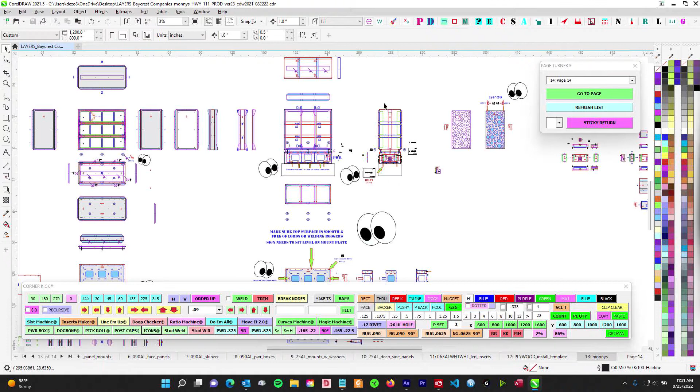Most of it's just a remix of all of our principles, so I'll just kind of point out how they work here, but none of this should throw you. It's just a mishmash. So let's go over the lay of the land.

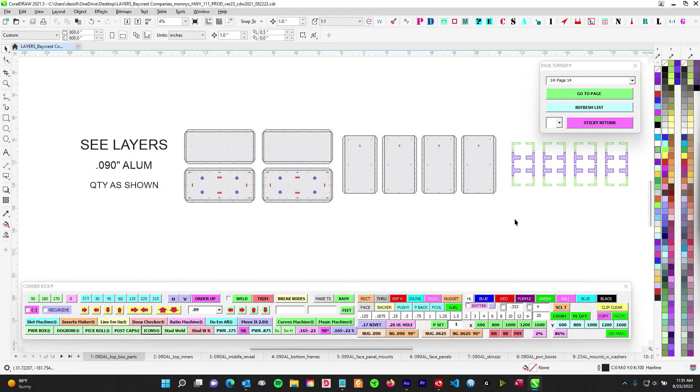I've got outside boxes, I'm calling them. The monument's kind of a wide boy, so a little wider than we're used to usually. But so you've got your jigs, and this will just be the outside box. And then there's sort of an inner framing, C channels and stuff like that.

You've got your middle reveal, 2 inch tall. We're going to fab that. And then the bottom box. So it's like a 3-section thing. We'll go over that, a little bit different than what we've done before.

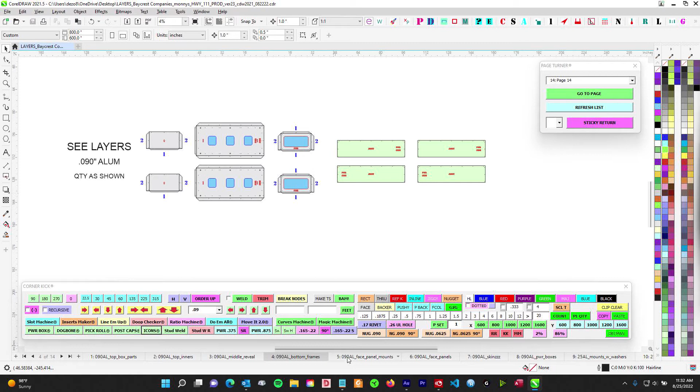You recognize these - these are just going to be the rivet-on face holders, the panels. And then it has exchangeable faces.

Now in this one, I'm sending this over to route with this note. We're still waiting - there could be some that have customer files that need to be approved. So you can route everything else and just wait until I confirm. Otherwise, we'll just route blanks and then we'll have to replace them later.

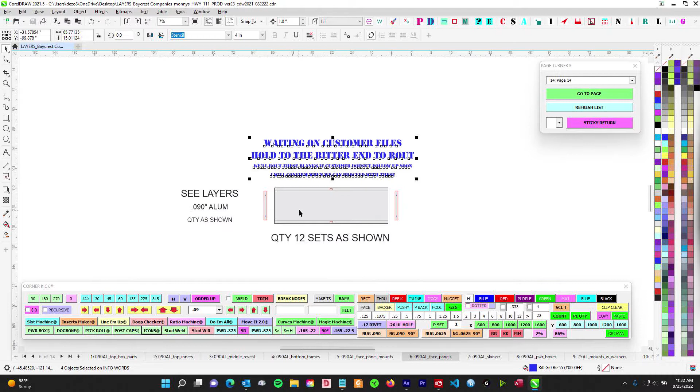So here's all the skins. I put them separately. Got your 4 - again, there's quantity 2 monuments. They're all identical, so everything should be in quantities of 2, multiples of 2 anyway. So you got your side.

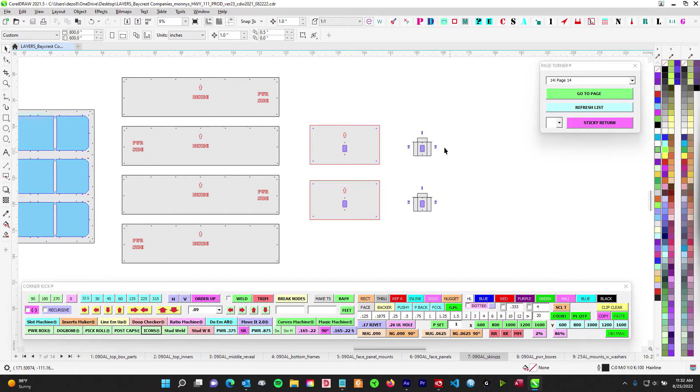So I got the bottom skins over here and got your side skins. And we're going to do the little birdhouses, or the little covers anyway. But those are going to be on the inside of the bottom powers there. We'll go over that, so keep an eye out for those.

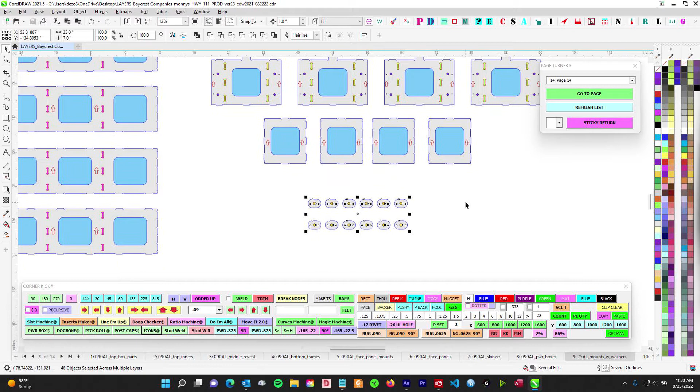Custom bird power boxes as usual, so keep an eye out for those. And you're going to have 2 large mounting foot plate thingamajiggers - that's the technical term, the thingamajiggers. And then you're going to have these little washers here for bolting this thing down. And then these things have some decorative side plates to kind of make them look cool. So look out for all this.

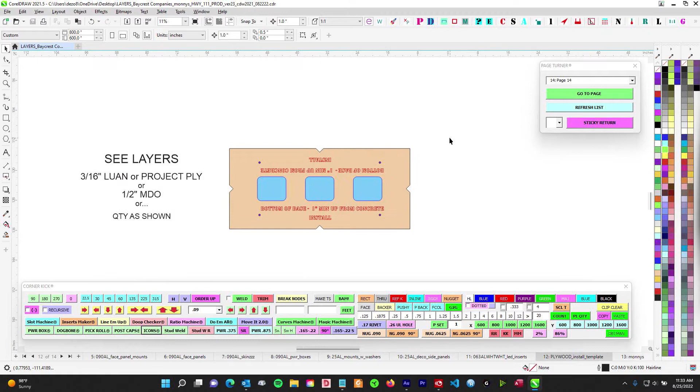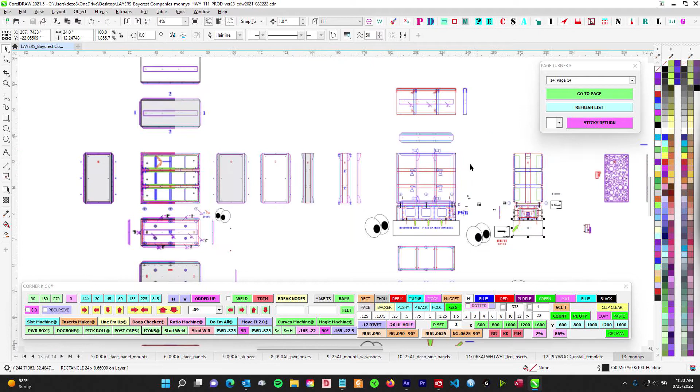All right, so where do we start? So like I say, this is the overall view of it, it's the side view. It's existing concrete, like I say, it's got 3 removable panels on one side and 3 removable panels on the other. So these guys are small enough, they're under 4 foot, that I went ahead and we're just going to do a tight shoe box.

Let's just start with these face frames. We're going to start with a tight shoe box. You can adjust the top and bottom in and out a little bit. And then we're just going to have screws on the end. The ends are equal, they're symmetrical, so you can flip-flop them either way.

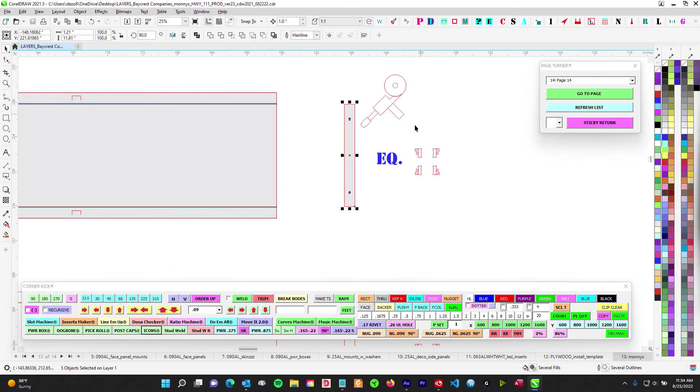I kind of laid it out that way for you, so you don't have to worry about getting them up or down. But like I say, we're going to wait till the very end on this, to see if anyone gets approved for logos before we route these. But you can get these routed up, so you kind of know how these work.

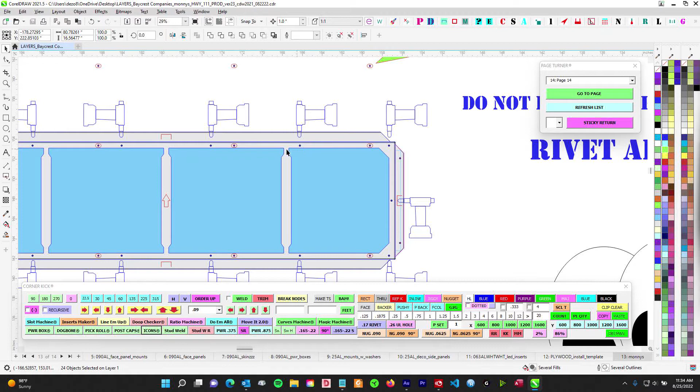And then when we're done, everything's all nailed down, you can just go through and slice these apart to separate them. Same thing with the face - when you guys go put the face, it's going to match those plate things there, and you'll just chop it all out. So that way it's stable for you.

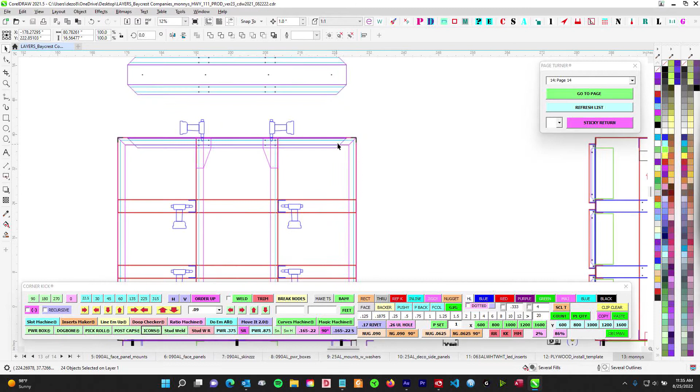Anyway, let's go over the frame. So the frame, like I say, it's a remix of what we do because it's so wide. We're kind of doing that inner frame like we do for Loma Linda or Panera, where we have the inner frame and then we put the hard candy shell. Similar - so on this one, it's just going to be a piece of 2x4 C channel that we fabricate for the top and the bottom.

Let's go over here - here it is. So you're going to have the top and the bottom.

Now these dog bones will be on the top and the bottom. It doesn't matter, I just kept it that way, it's just easier in case you accidentally get it the wrong side up. You don't have to worry about it.

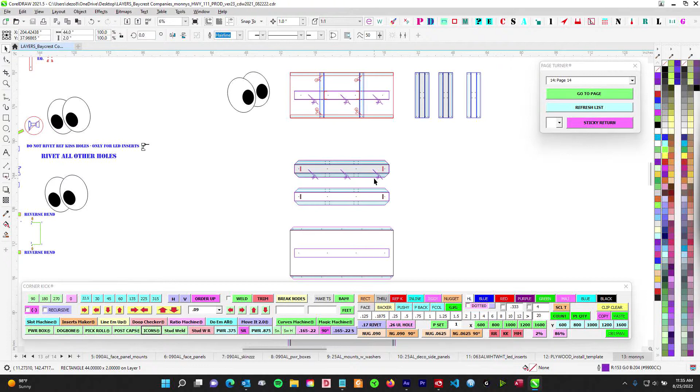So you'll take this one here, fold it, and then take these long runners with the little kick-out legs. Those are your two main structures. You can see where you're going to create a top bar here, and then a bottom bar there. And then this is all just rivetable.

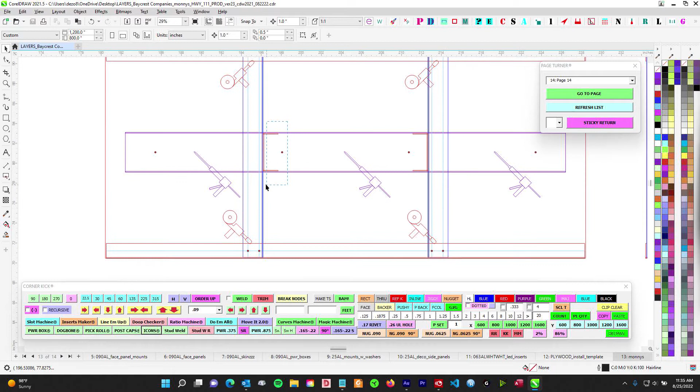And then you're just going to rivet those. This goes inside the other one, trying to save that jig. So this is a top view of that top bar. You'll slide that in there, go ahead and rivet that up. And then you'll rivet in some crossbars here that extend to the face.

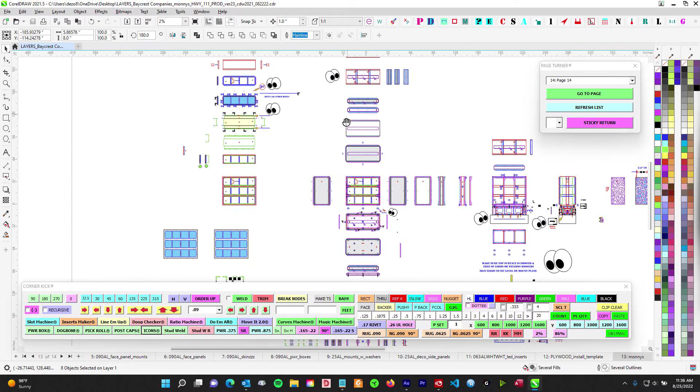And then how we do when we have these removable panels like this, we'll have a C channel that runs across. So these jigs might be familiar to you. You're going to have a C channel that runs across, and these C channels are up here, with all the various holes for all the various things. So you can see where these two holes here interlock with that crossbar going across there.

So again, we're pushing 22 inches wide, so I wanted that stability, you can see where that goes across. And these are the C channels for the face.

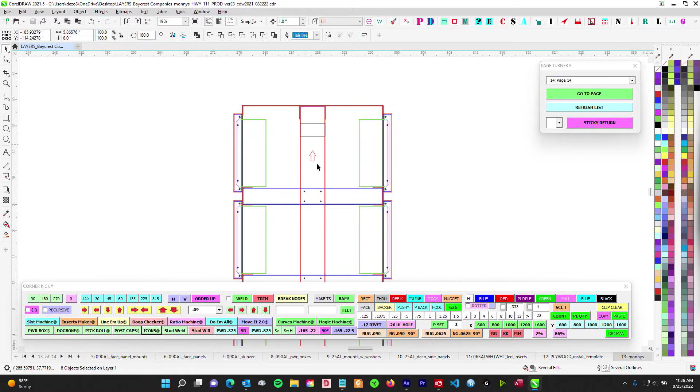So these guys here, I'm thinking you could just rivet all this crossbar stuff first. And then when you build this around it and put the skin around it, you can lords this all up nice.

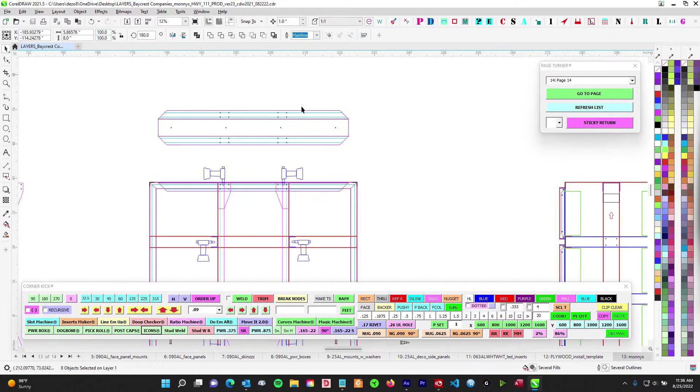And then when you bring these in, you can go ahead and tack those, just for easeability, because you can't really get the rivet gun in there. But this crossbar inner part, I think you can rivet all that together, and then start lordsing and building the outside frame to it.

So it's kind of similar to that inner frame with the hard candy shell. And then once this box is built, I think you're safe to go ahead and lords on your faces.

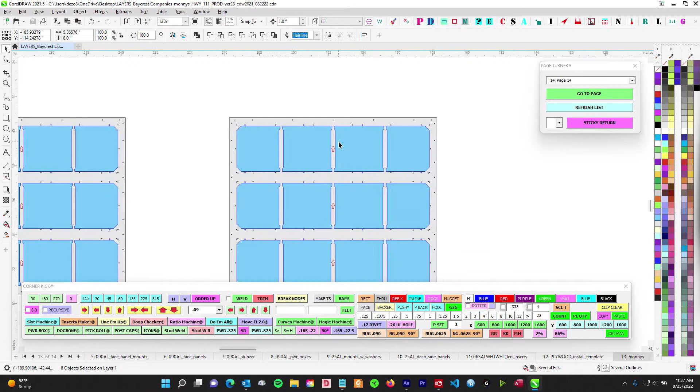I didn't do a left and right, they should mirror perfectly, it's just up and down. So make sure that's up, but you should be able to just use one in one direction, one the other. If you want to make sure, these reference kisses could be the inside of one, and this could be the outside of the other. Just keep them facing the same way, but they should mirror horizontally with no problem.

So I think you're good to go. If you build this box, get it all tacked, get it all built, then you're good to go to just lords on faces, and then you're kind of done there.

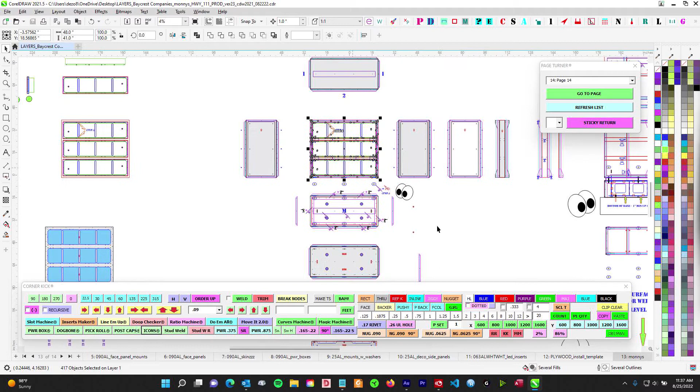And then similar to how we do, we make our reveal, which is here. So the reveal is just 2x all the way around, fabricated channel. And then again, this slides inside, trying to save those jigs. And then you can just tack it, clean it up.

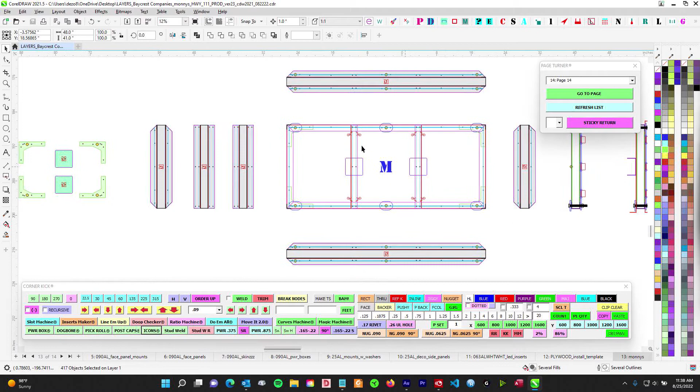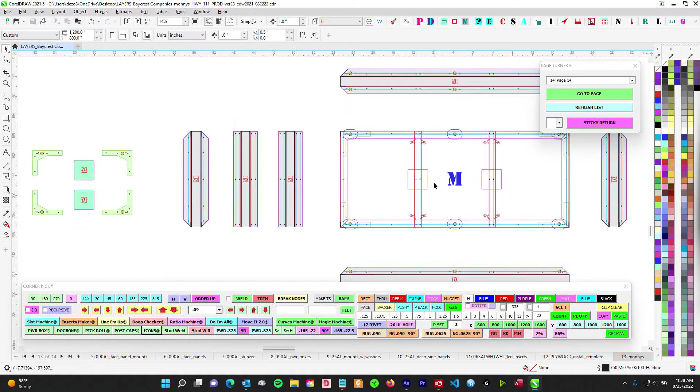But that leaves us with a void. And because this thing's so wide, the sign itself is so wide across here, I went ahead and gave you, copying the Indio letters, some little plates here that you can tack to this and then clean it up. So you can just tack it there and there. So on the top and the bottom, you can take these little square pads, and that's just going to help build up that void down there, because when that goes across.

So if that makes sense, I think you got that. I thought I made a little call-out for that, I must have got lost. Anyway, there it is, the 090 spacers.

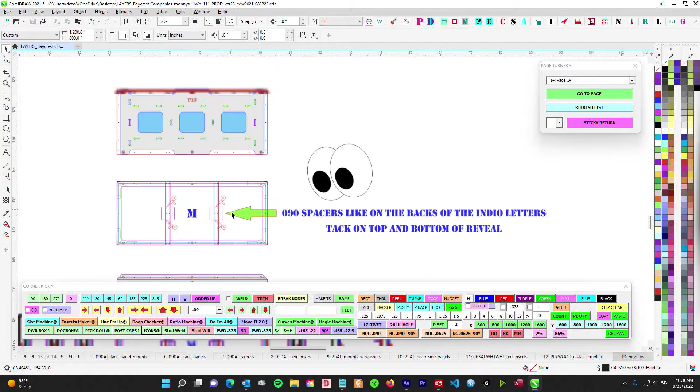So you can just tack those up, kind of like you did on the back there, so when you crank down the bolts. Once you get that taken care of, you're just going to take that, lords it, and self-tapper that to the bottom of the main box. So you got the main box, you can go ahead and permanently mount your reveal to that.

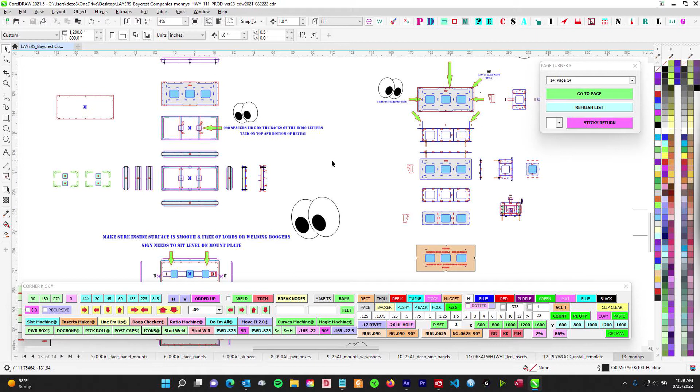Now's where we get a little different. This is going to be kind of like the VIP, or even the Thunderbird, where we made a very substantial mounting jig that essentially takes up the entire bottom area. So the whole bottom skirt - once you've got the top box done and your reveal in place, go ahead and put that on.

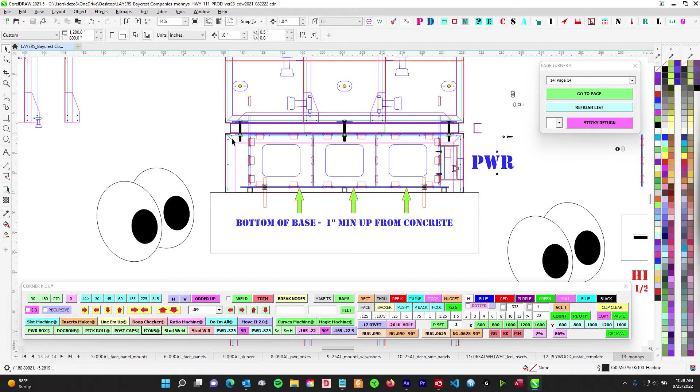Then this bottom box you're going to build is just going to be a hollow box. So you've got the whole bottom here, and then you've got two giant solid jigs on the side - these ones marked jiggy go on the inside, and you'll go ahead and tack all this around here.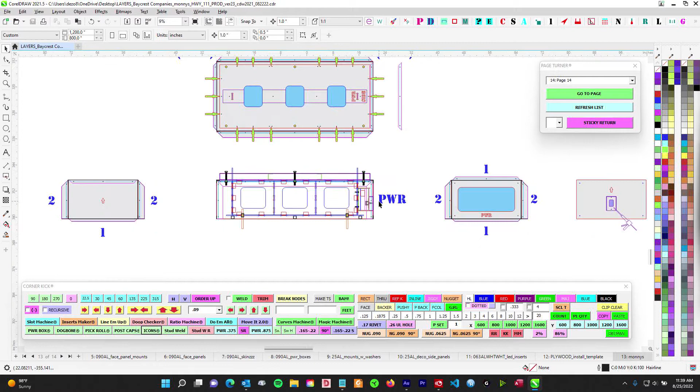But we do have a power side, so make sure you line up the power to the power - you see the power side there. The reason is everything else here is symmetrical, but once we get down here we have a door panel that comes off, so this whole side is chopped by 0.1, and it's important this bottom thing all lines up.

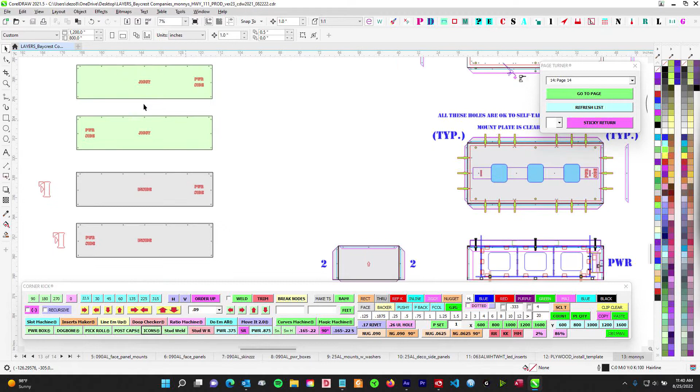So power goes to the power side, and these jiggies go to the power side because these holes are a little off. Also the skin will stick out 0.1 longer, so once you get to this part, it's not symmetrical - everything else here, you can horizontally flip them, but once we get down here, keep an eye on your power sides.

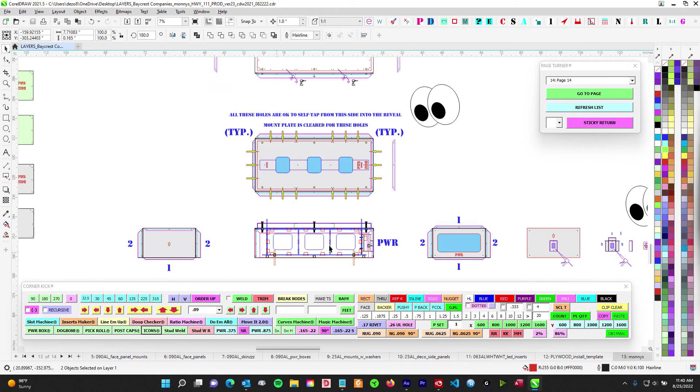Then the whole bottom is going to be hollow and empty, because it's essentially going to slide over the mounting base and then just get bolted to it. What you want to do is make sure this whole bottom is nice and clean once you're done - all inside here, after welding and cleaning it.

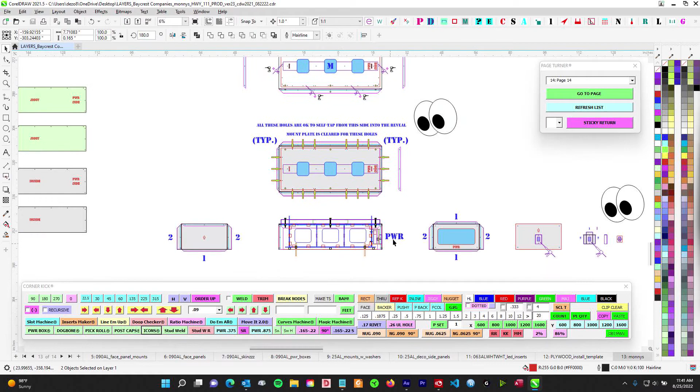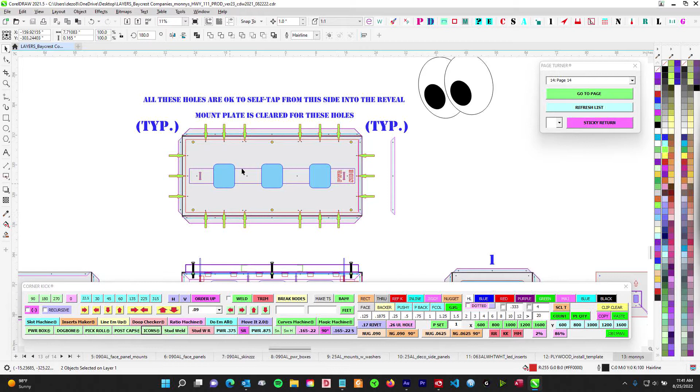Now I do have clearance for the welds - I know you're going to have a jig here and welds here, that's fine. But once you're done welding and making sure this big hollow box is all strong, flip it on its backside and grind around in there to make sure it's all clean - no welding boogers or blobs anywhere - because this needs to sit flush right on that top deck, nice and clean.

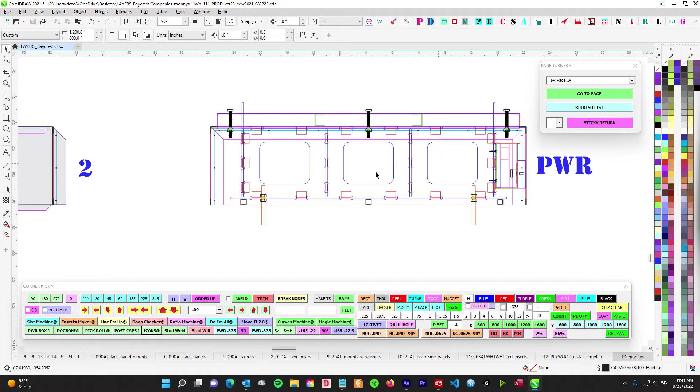So once that's taken care of, just like with the Indio letters - I don't have it here - but this area is going to be all void. You'll have 090 skin, but it'll be 090 away from the skin. So put some good big blobs of Lord's all in here, all on the jig, all along here - that's what holds this thing together.

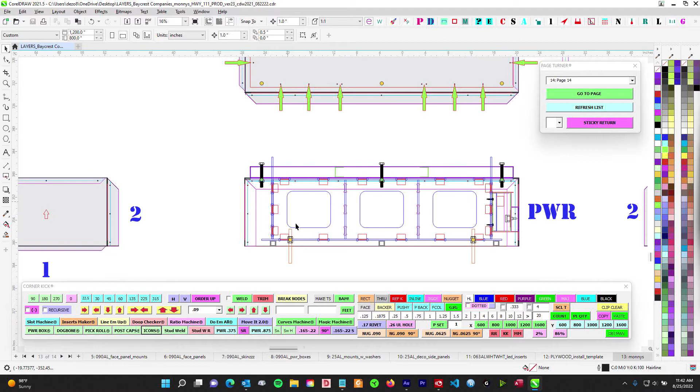You'll have a nice bead of Lord's all the way around here, and then just fill up that gap. I didn't want to have to route a bunch of little pieces and make it fiddly, so just put some nice blobs. Then when you're all said and done, you go ahead and Lord's and self-tap this whole bottom part onto your reveal, completing the sandwich.

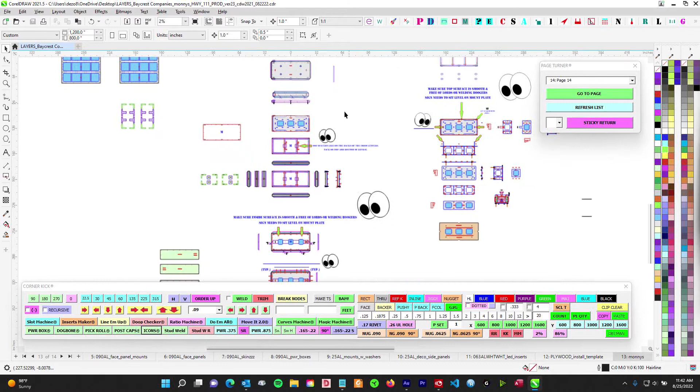Where's my side view? There you go - so you can go ahead and nail it in. Now you can come in from the bottom, and it's okay to self-tap this whole bottom structure with Lords, since I've clearanced these particular holes so you won't hit anything you can't use.

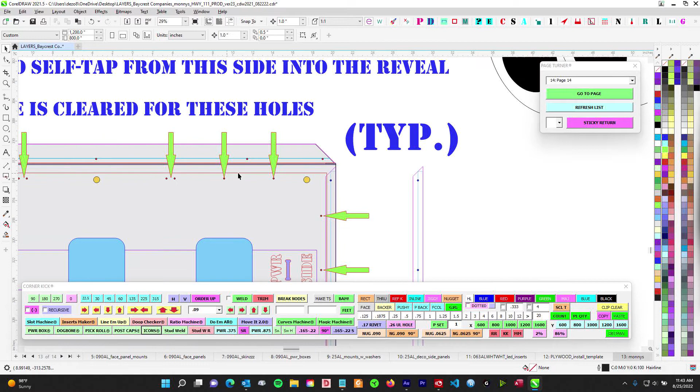This is a little less updated, so these aren't here either - don't worry about those. But anyway, any of these holes you are allowed to shoot screws through to augment your Lords. You can see where the reveal will be, that red line. I went ahead and notched the top plate, so you can see where I got clearance for those holes all the way along there and all the way along here. So feel free to screw it up real good, making sure it's nice and tight.

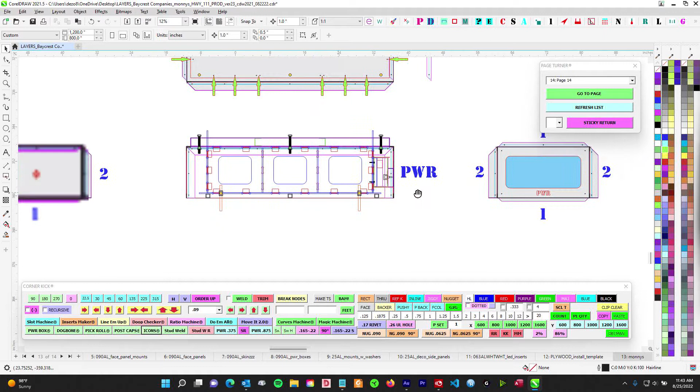Going forward, be careful, because this whole sign will be just on this edge. So putting on the carts and stuff, just be careful. I think it'll be fine, because you'll have 090 here stacked with 090, stacked with 090. So we're pushing close to 3/8 to a half inch just in the corners there. I think you'll be fine.

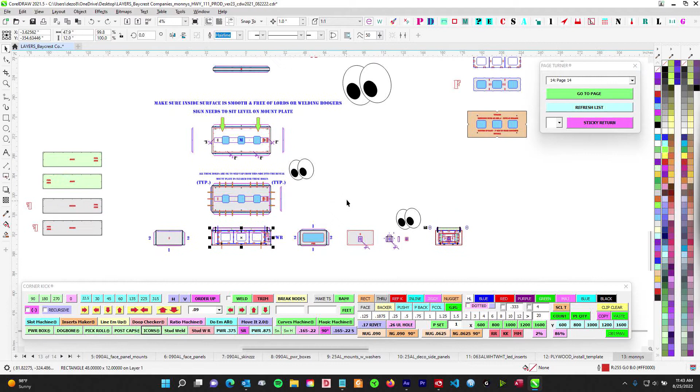But just pass it on to prep and stuff, that if you kind of tilt this on its side or something, this is just going to be 090 on 090. So watch for dents, watch for, it'll be vulnerable. Just be careful. But I think we're good there. So that's all pretty straightforward.

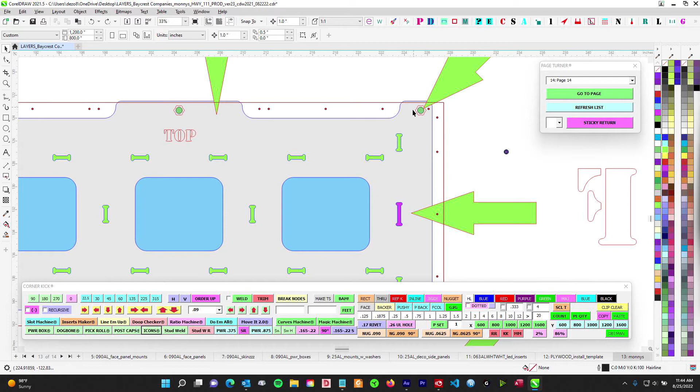That'll make the boxes. So now the mounting base, again, you're just going to put the top down. You have all the dog bones. Now these two dog bones here will be all the way through, and those are going to be alignment pins for the whole sign. You are going to go ahead and tack on the half 13 like we do in these 6 spots there.

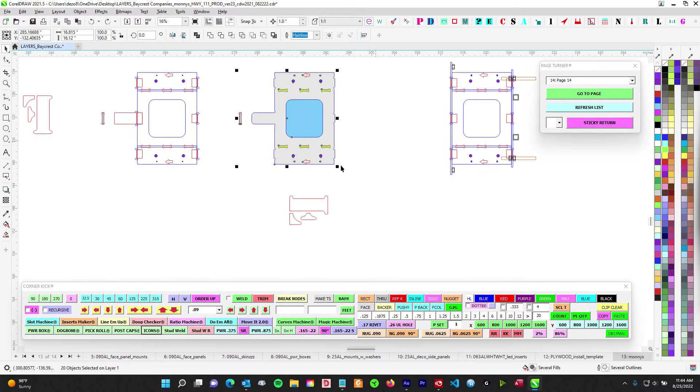And then you're just going to lay it on top of the bottom piece. And then you have 2 long runners here, right? You got these 2 long runners. They go here, and then they die out up against 2 main long plates. So these 2 guys here, I'm going to go ahead and flip this. There you go. All right. So that'll be like that.

So the 2 end plates are going to have long dog bones that extend up through these 2 slots, and then they will protrude up into the sign. And then that's going to give this whole thing, because like I say, you're going to drop this thing on, and then once it's on there, it's sort of pushing it back and forth, trying to center it. So these should help slot this right where it needs to be.

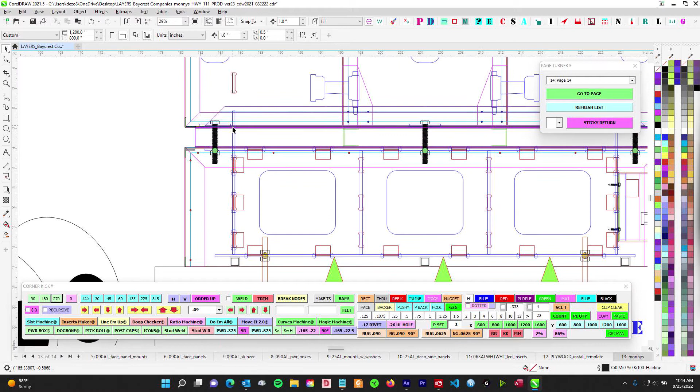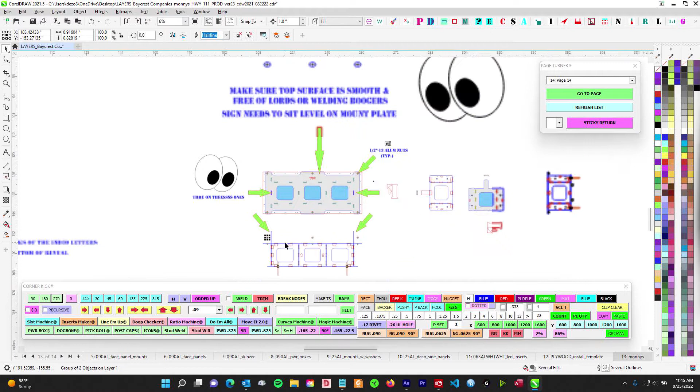And then install can slide through, and they're just going to sandwich this thing down to the 1/4 inch base plate system. So this will be the 1/4 inch base plate system from the side view, and they're going to Hilti in their studs like they do. And then where these nuts will be there, that'll be ready to receive the sign itself. So they'll take off this bottom panel, reach inside, and they can just strap this right down. So it should be nice and strong.

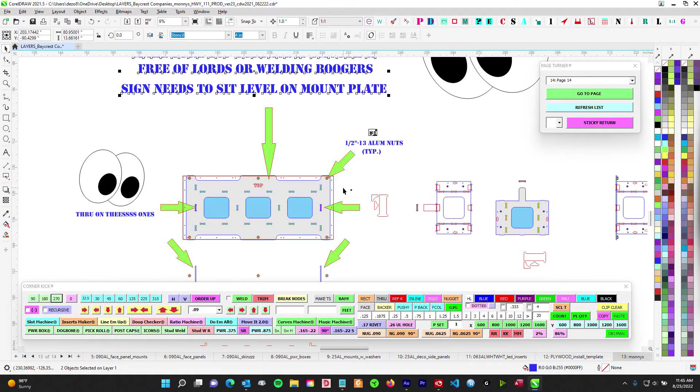And that's the side view there. You can see where it's just going to sit right on there. So the other side of that is just like the other bottom box. Make sure this top plate is nice and clean. Make sure there's no weld boogers. Make sure there's no accidental weld blobs or anything, because the sign needs to sit flush against there. So this surface here needs to be clean up against that surface.

Okay, so otherwise, yeah, I think you got that done. Knock that out. You got this.

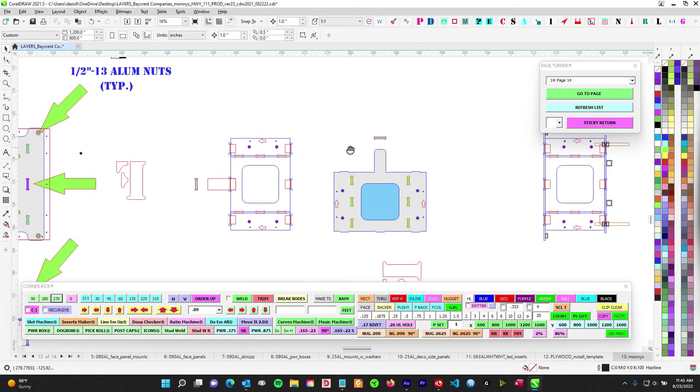And then the power will be on the power side. Now, this is symmetrical. I went ahead and made both ends the same, so you can just choose which one, dedicate it to that being the power side.

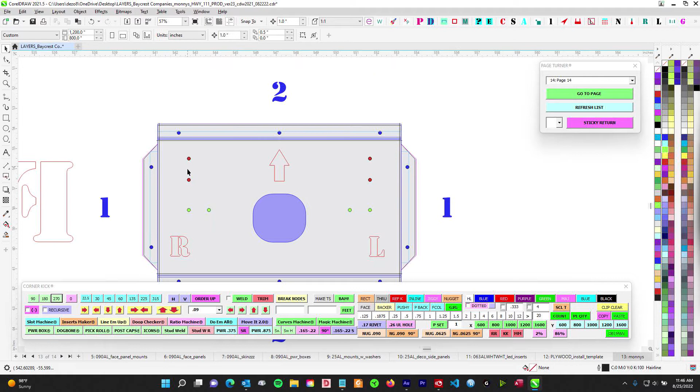Haha. What's up, you all?

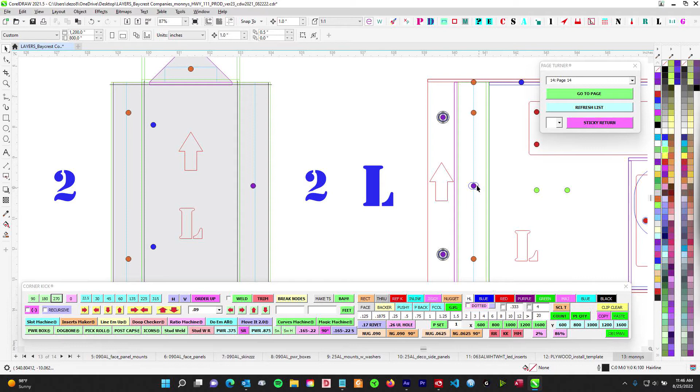What's up, Edgar? You got your ends here. Make sure you get the right side. Again, remember cavity out, you can see there. So cavity out, this will be the left side. That way the screw is not on the inside, it's on the outside. And you can rivet along the back side there.

And then you can see a top view here. The door will wrap around and it'll screw on. That's the door here. You can go ahead and use our switch plate from the front, put the switch plate to the back, screw it from the front, and there you go.

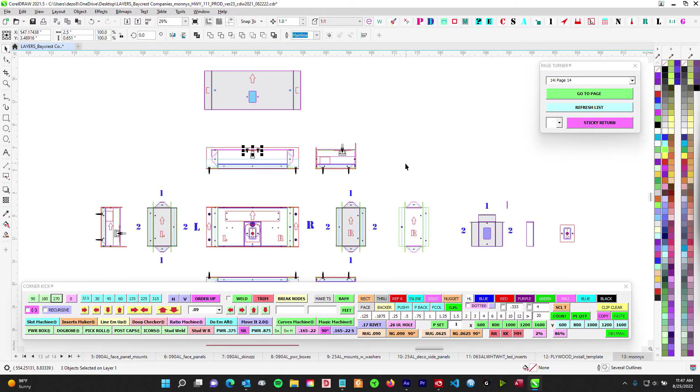Now, the birdhouse, we usually do this little protective thing. What you're going to do is get that bent up, and that's going to get welded to the door. So that's going to be permanently mounted to the door. And then when the door is on there, you can see here the purple, that'll be the protection for the switch. And then you can see here, this is the switch box assembly from the side view. And you'll be able to slide that over and it'll be great.

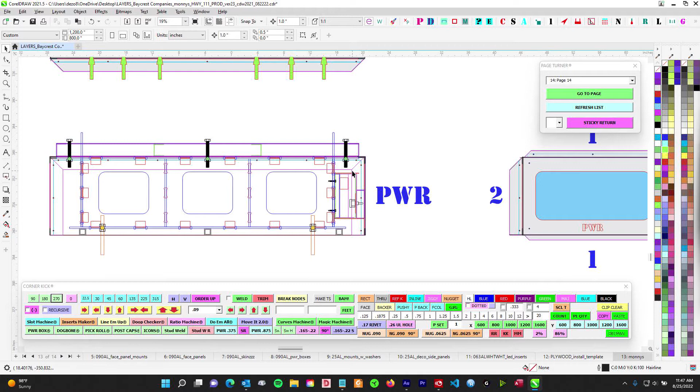So what we're going to do there is go ahead and self-tap that right there. Self-tap that, that'll be semi-permanent.

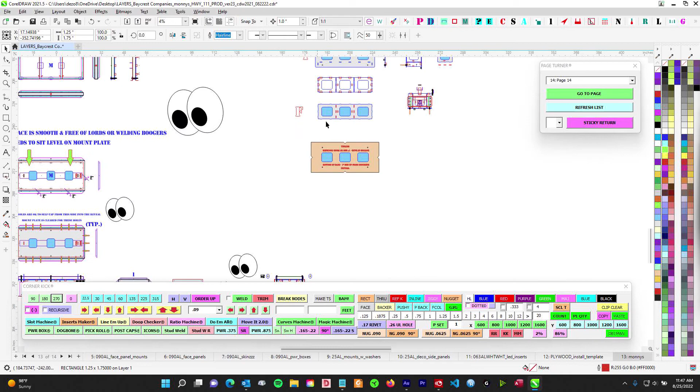So there's no reason once this box is on there with these self-tappers that keeps our bonding and everything. And then you can see where the power supply will be right there. And install, you have your base here, these 3 areas to bring wire in, and install just needs to get that wire to the back side. I got a 7/8 hole on the back. They just need to get primary wire to inside this box.

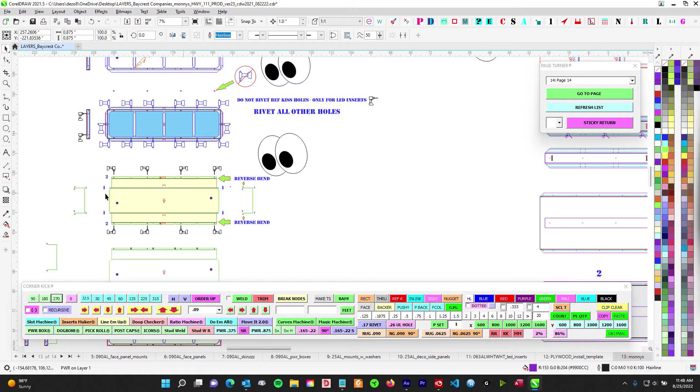And then all you need to do is take all your leashes like you do, collect them and attach them all to themselves. And then you just need to get your leashes down through the bottom. I got you plenty of collection points, plenty of collection holes. Just work your way through, and they all need to just get to that side box.

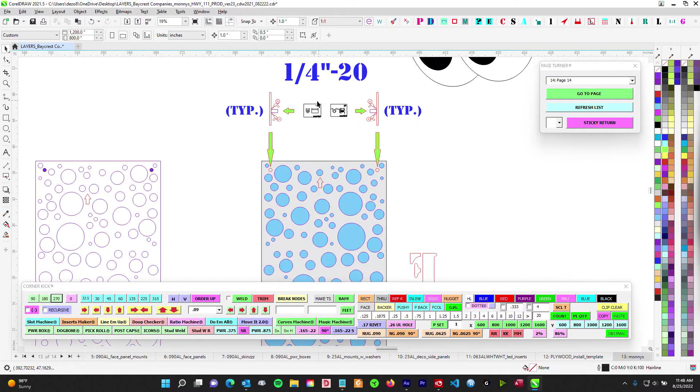So that's the box. Now we got these decorative things. I'm bringing in these 1 inch by quarter-20 tapped aluminum stud standoff things. They're just gonna fit right inside the island. Look for all 6 of those. I have an opening on the inside here. Look for that, and then that's easy enough when you're all done, when it's all prepped and ready for assembly, you're just going to reach inside.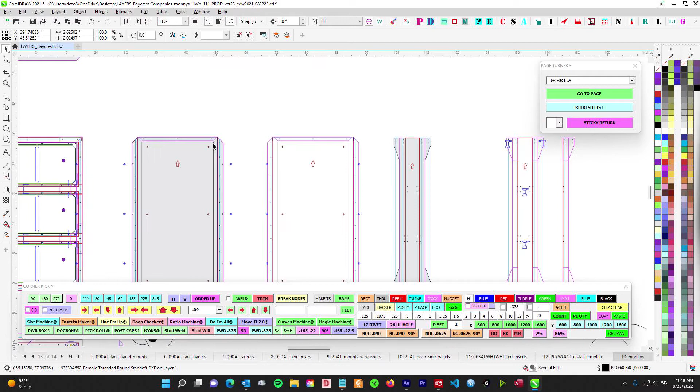6/4 20 screws are going to go ahead and nail that down. And those are just going to sit on the side looking pretty. So that's that.

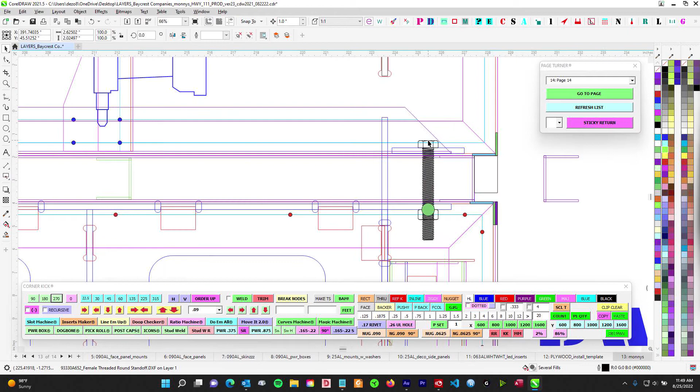The washers - I have these 1/4 inch disc washers, they're 193s. You can go ahead and just tack those to the inside. That's going to be where install smashes this down, so I put a little washer there for that effect. So keep an eye out for those.

I'll bring in some 4-inch all threads just to make sure we have them here. Hilti, the usual for install. You got the 1/2 by 13 glue in. I'm giving you an install template here.

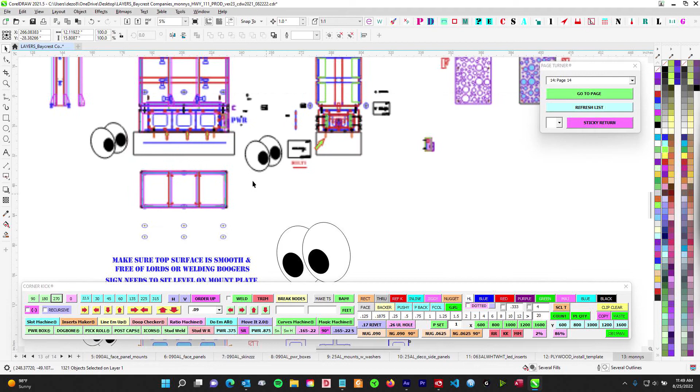Now for install, all you need to do is really simple. If you take some scrap pieces of 1x1 square tube with you, just some long runs, you can just cut. I have them this way, but actually you could do it this way. If you take 2 or 3 sticks with you, lay it across, and then after you put the studs in, you just back this up there. Just make sure you're at a minimum of 1 inch.

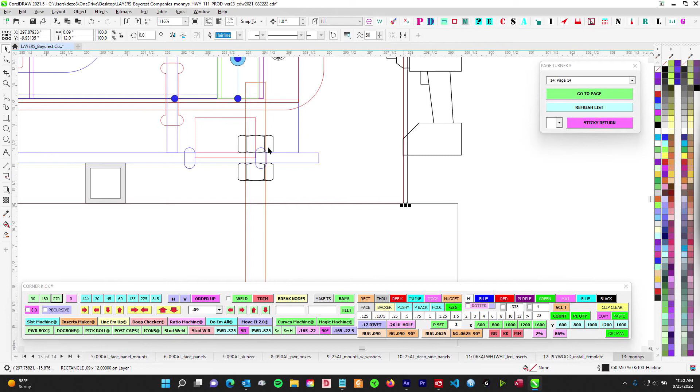Now I would probably lift this just a little bit more, and every little bit more you lift above the 1 inch mark means that the skirt will clear. The skirt is going to be literally the same height as this, so if you leave this at 1 inch, then it's literally going to be right up against the concrete. So if you take some 1x1 tubing with you, get this thing on there, set your nuts to that, and then maybe lift it just a little bit. That'll give you clearance when you go to actually put the sign on the concrete.

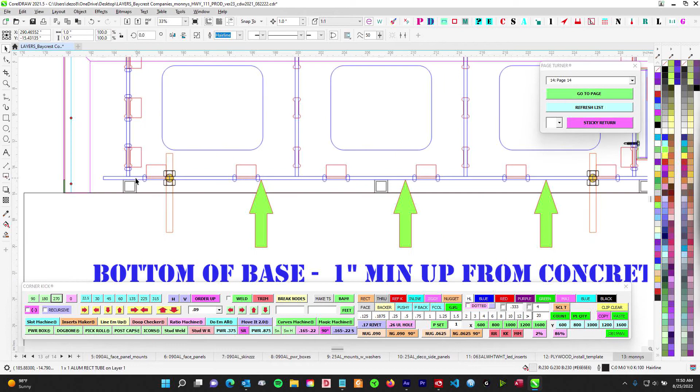So just use that, but it's really easy. Like I said, I have that laid out for some 1x1 square tube - bring that with you, easy spacer. Set it on there, set your depth, get it adjusted, good to go.

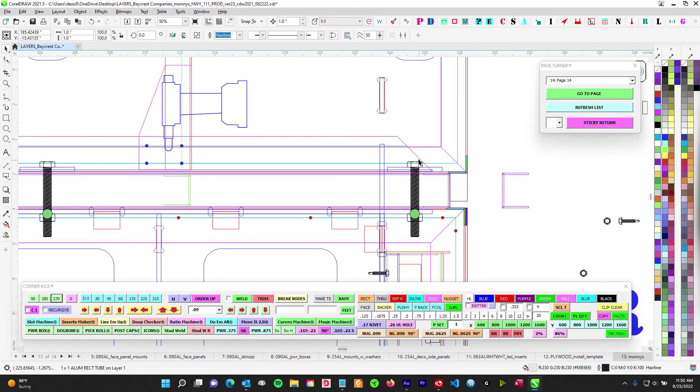And then you can go ahead and bolt this together - fab, after you get this set, then when you slide this down, fab will have this all set up. You just go ahead and slide that bolt through here, it'll go through there and you'll catch these nuts right here. Good to go. And then you'll be on your way out.

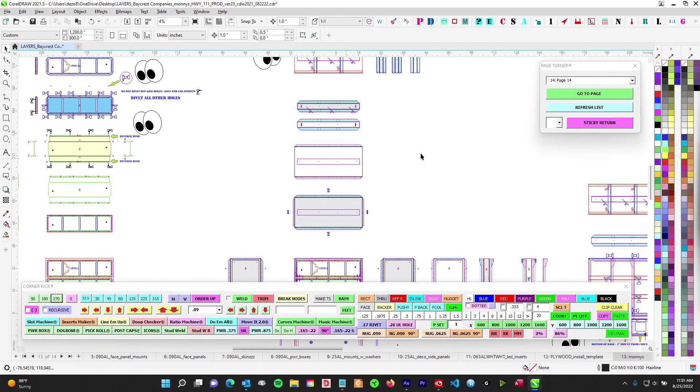Hopefully that's all good for you guys. I think that's it - this guy here, let's see. Yeah, got that. The faces, like I said, we're going to hold off on those to the very bitter end, and then we'll release those. Yeah, I think that's it.